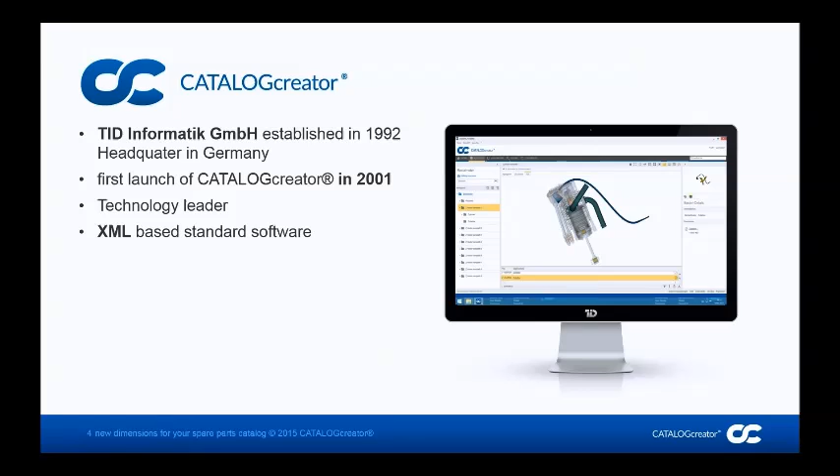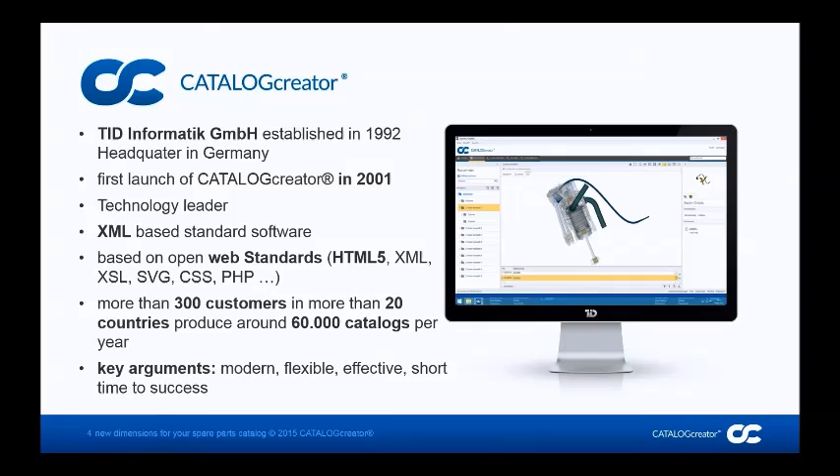CatalogCreator is the main product of TID Informatik, which got established in 1992 with the headquarters in Germany. The first launch of CatalogCreator was in 2001 and became technology leader as an XML-based standard software for catalogs based on open web standards. More than 300 customers in more than 20 countries produce around 60,000 catalogs per year with CatalogCreator. Our key arguments to choose CatalogCreator: it's modern, flexible, effective, and it takes a short time to success with CatalogCreator.

I'm super excited to present to you now the 3D catalog created with the all-new 2015 CatalogCreator. Before, we have a poll question for you to answer. So, as Mark said, please take about 20 seconds. I would really appreciate if you get back. Okay.

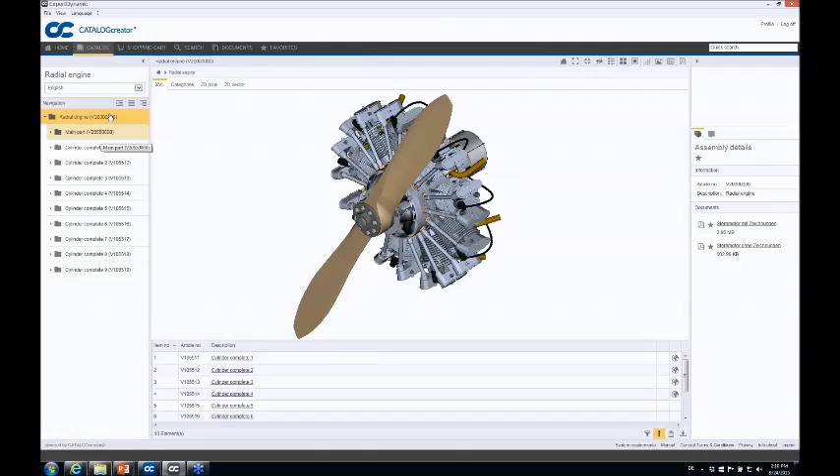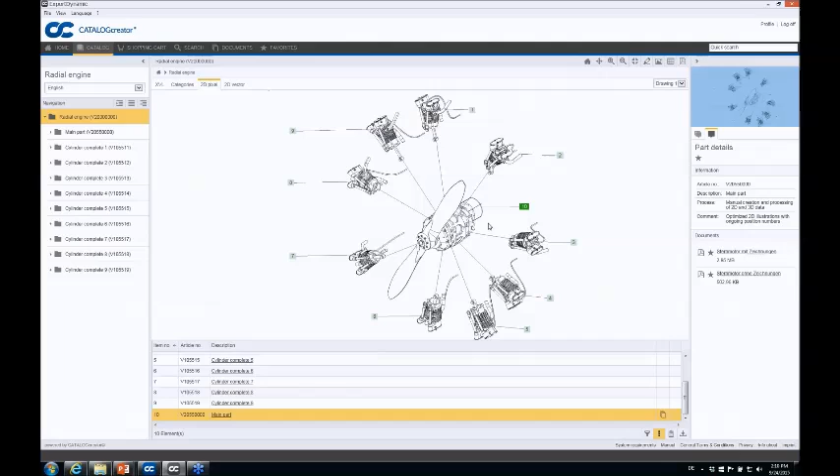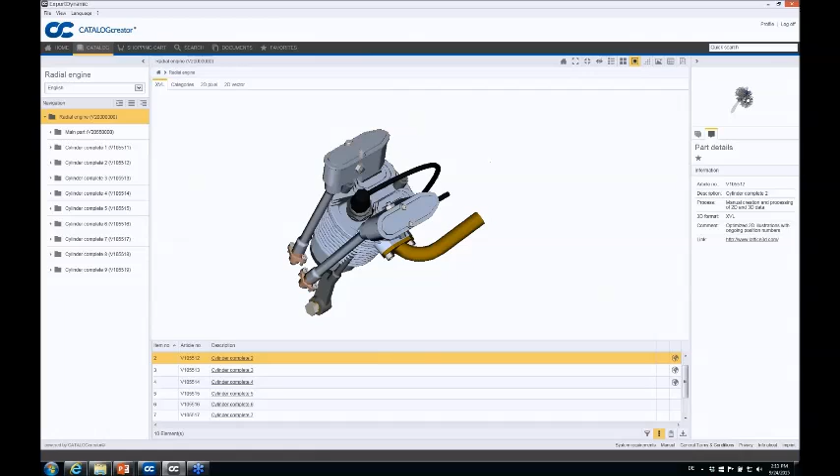We have here different tabs to switch between the views from a 3D model to a two-dimensional view, the drawing. In the lower part here, we have the parts list. And up here in the upper right corner, we have a second view. So when we show the 3D model, we see the selected part. And we have here the option to switch and show the selected part in the main area, and have the overview up here, and switch back.

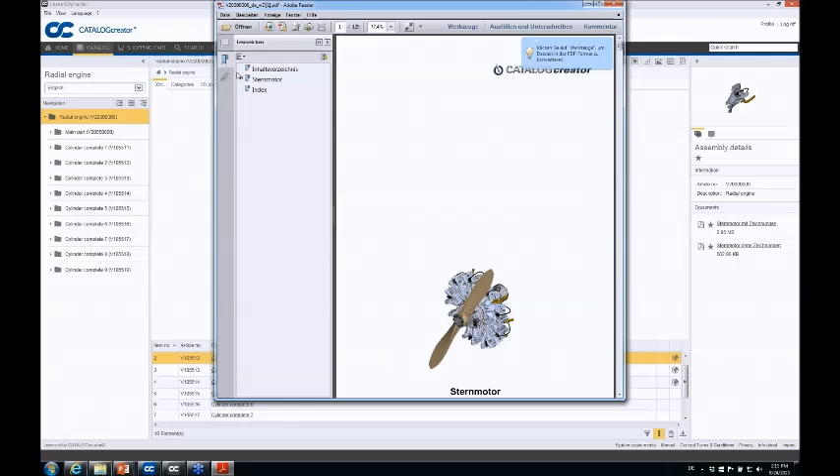Below here on the right hand side we have all kind of additional information concerning the assembly, where we can add different kind of information. We can add any documents. Here as an example, it's a German version. I'm sorry, I have to add an English version sometime, but here we added the complete PDF file, spare part catalog. But I mean, any information related to this assembly could be attached right there, or even web links and additional part information.

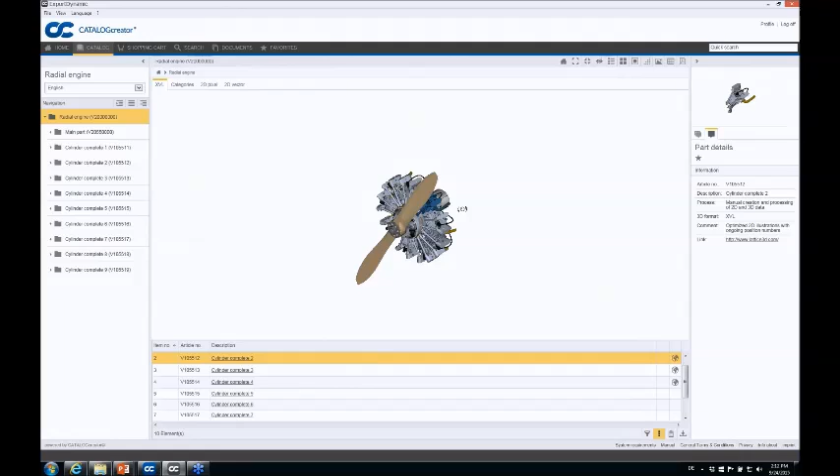So, but let's talk about the purpose of a catalog. Let's assume I'm a customer and I have a broken gear wheel for the cam gear somewhere in the middle of this engine. It's very intuitive. All I do now is I know it's somewhere right in here, and I double click. Something is going on, and as you can notice, we're moving down the structure tree deeper into the machine, into the engine.

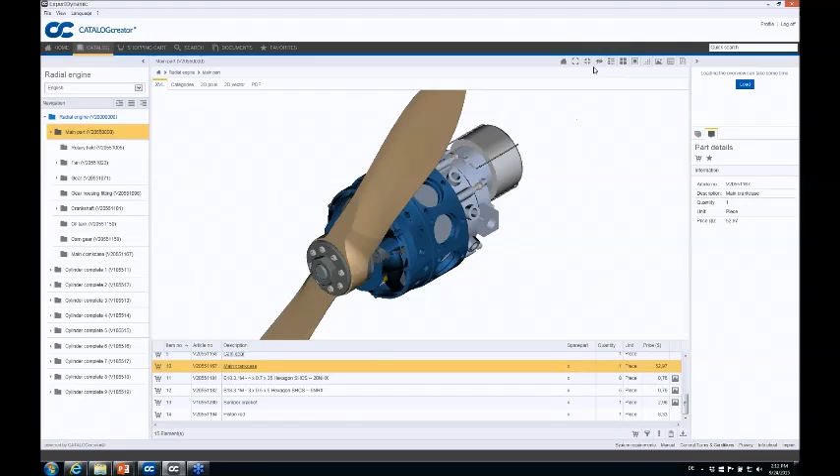I know my gear wheel is somewhere behind this casing, so what can I do now? I don't see it. There's an option right here where I just hide the part, and here we go. I already found it. This is still an assembly. I want to go down all the way to the gear wheel by double clicking. I'm going one level deeper into the machine.

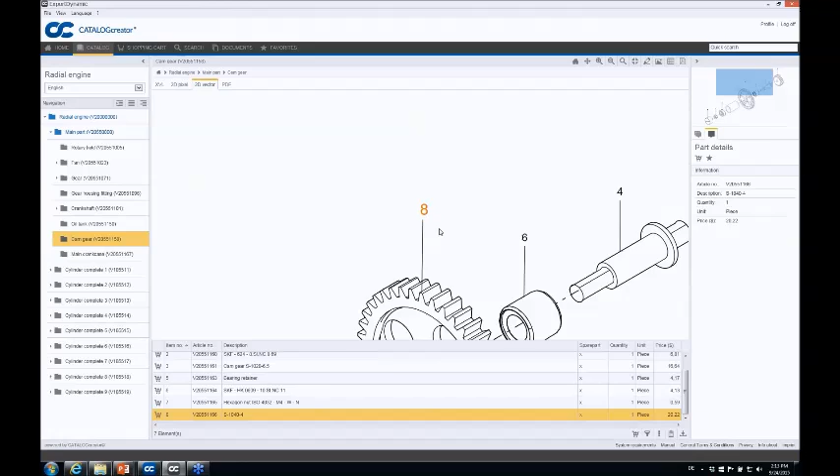And here's my part. Now to verify, I could also click on the drawing and have a different view, or whatever file format is attached to this assembly. I now can add it to my favorite list, or simply add it to my basket.

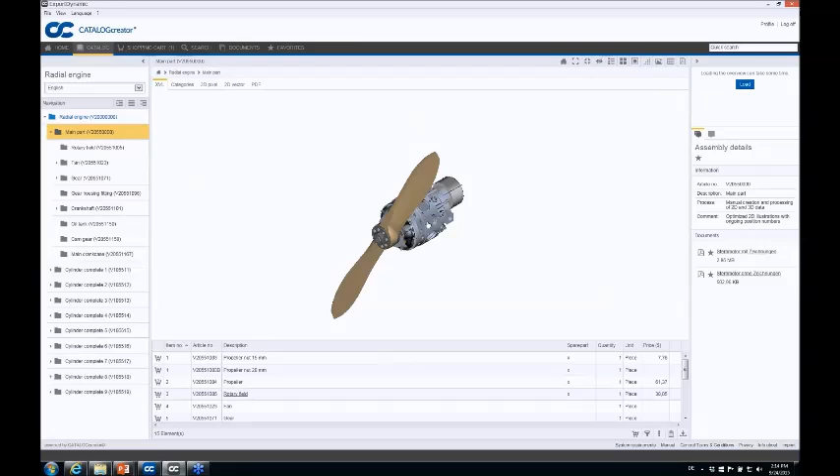Okay. Oh, now I just realized I forgot to add the hex nut which I need to mount this wheel. But now I'm too lazy to navigate through the whole engine again, so let's try out the search option. It's very intuitive again. I have here the option to type in any search word.

In our case, let's use two simple words. We're going to search the entire catalog, and we're going to search through the entire structure because I have no clue where I found my gear wheel.

Okay, it seems like I'm having a problem now because I found tons of hexagon nuts here and I have no clue which one is the one I need. But I remember the wheel I needed was for the cam gear, so I simply filter my result list with cam and one part is left.

So I'm not sure if I'm just lucky at this point and got the right nut right away, but to double check, I just click on the part and I find an assembly which looks very familiar. I'm sure this is what I just had opened before, but I don't see the nut.

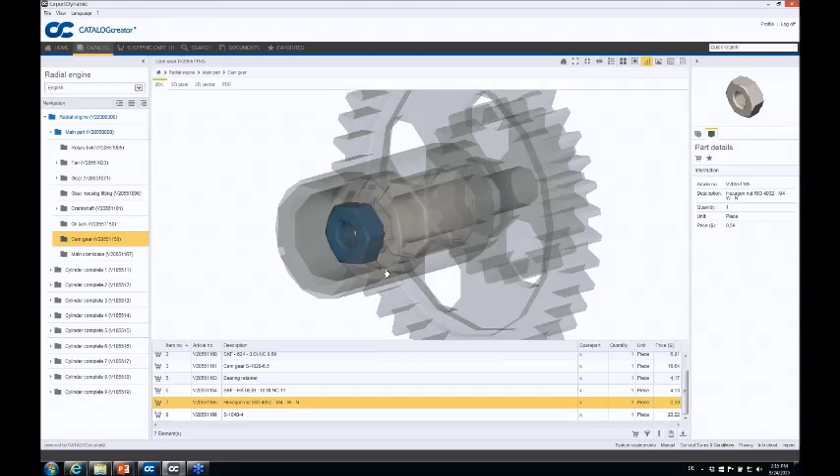So here we have another option where I just click on transparent view, and as you can see, here's my selected part. As well, when I go into the drawing to confirm, at this point I'm 100% sure I found the part I was looking for. So let's add this part as well to the basket.

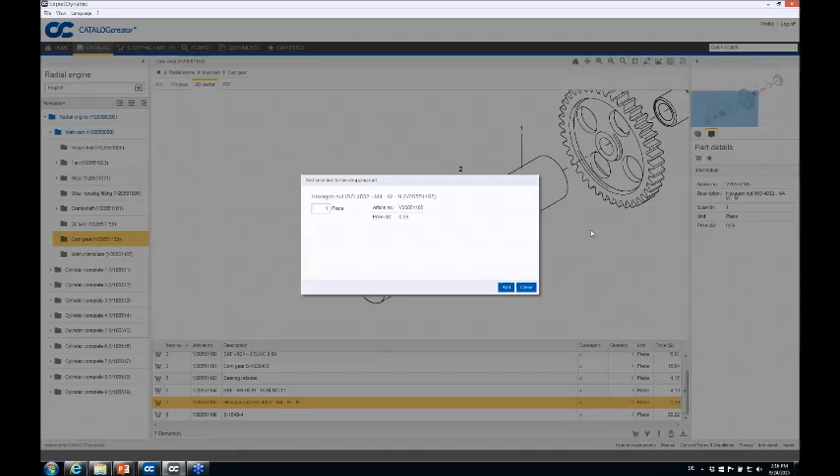So this was super easy. Don't you agree? It is so easy. I actually know of a CatalogCreator customer who increased the revenue by thousands a year with selling standard parts. I know they didn't sell much standard parts before. It was not really lucrative because they had to increase the margin.

But now, since it was suddenly so easy and convenient for their clients to add standard parts to their order, a higher margin did not matter anymore. Just imagine the time, hassle, and expensive downtime of a machine a customer can save by correct and fast identification.

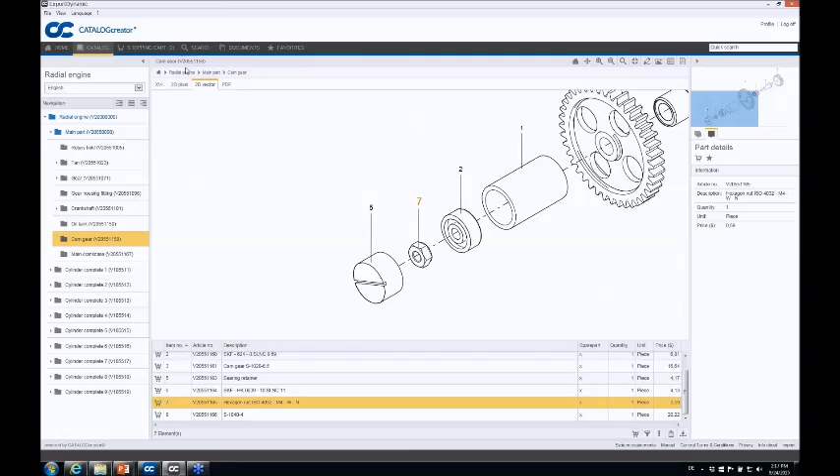So now, after we added these parts to the shopping cart, at this point we would customize the checkout option. We could simply turn the basket into an order email for manual processing, or hand it over to an existing web shop or ERP system for checkout. Or we could also pull real-time information like availability or pricing from an existing ERP or shop system.

We also have here our favorite list, which is very convenient as well, since it collects all our favorites by catalog. Let's imagine we would have multiple catalogs. We would see them here, and here we can switch between the selected parts and assemblies, or documents. Let's add a document to see how that looks.

The loading time could be dramatically reduced. Let's do this first. We have a customer profile where I can change the settings, how I like things. So let's say the 3D model is nice, but it takes a bit of time to load. So I'd rather see the categories first as a first choice. I'll save it right in here.

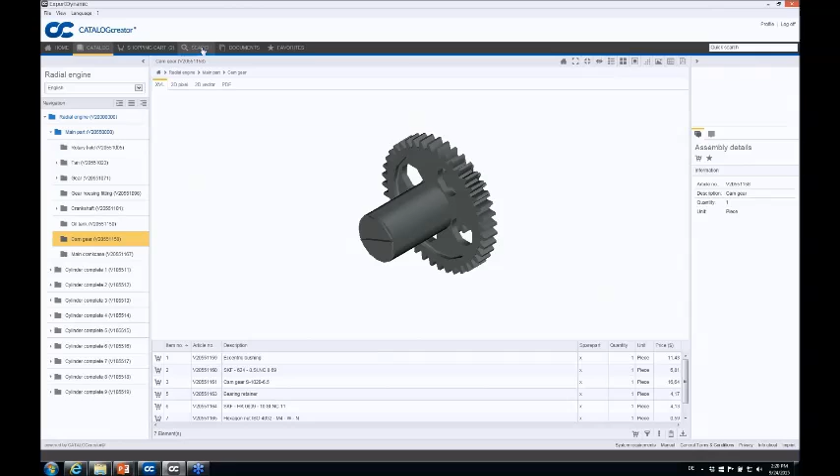So when I go back now and go on the document tab, I have all the documents which I need related to this machine. And also when I go back to my search, it keeps the search history. So when I start a new search, let's try an article number. Here we are back again. I have here my search results.

So this was a quick overview of the online 3D catalog. And I hope you liked it.

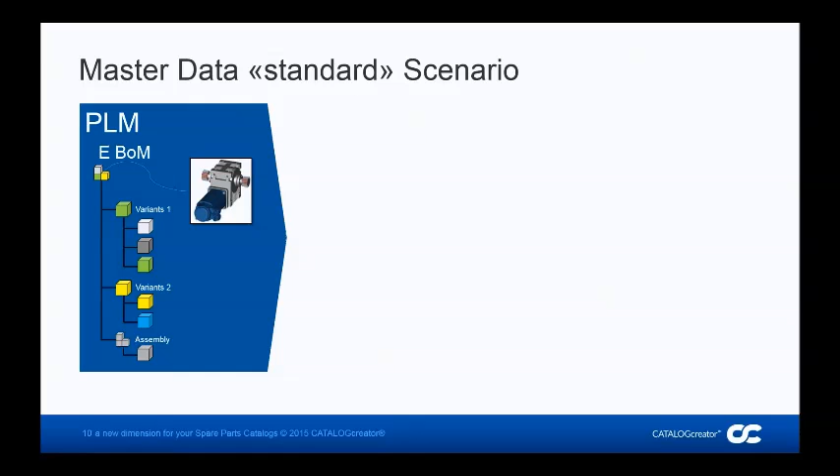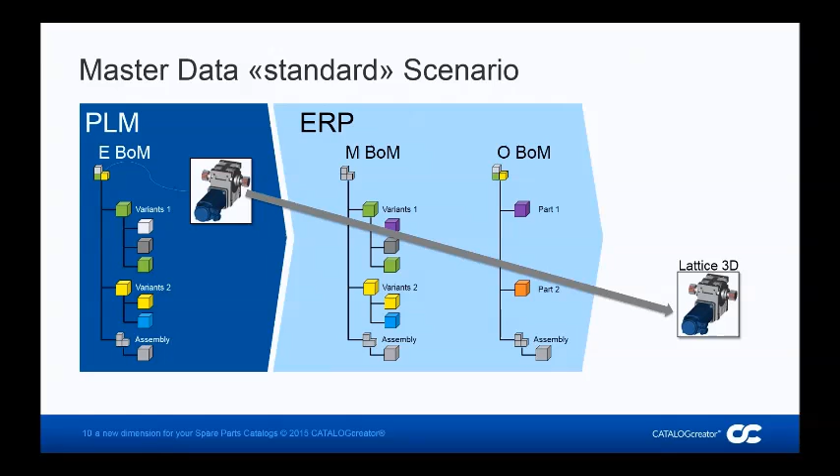So let's show my screen again. To create a simple online catalog, we don't need much. Some geometric data, ideally some three-dimensional MCAD models, usually kept within a PLM or PDM system, and a bill of material - short BOM - with a structure ideally representing an actual machine order with all the changes made to the BOM.

But often this is not all. We probably have additional data, even from different databases. It could be information from a linguistic database, since corporate ERP systems often are limited to 4 to 8 languages. Or let's say we have the spare part prices in a different database, since the whole after-sale gets managed by a different department on a different ERP client, for instance. In addition, imagine all the manuals and maintenance instructions which could bear valuable information for spare part service or spare part identification.

Before I show you the creation process now with this kind of data, I would like to know who of you works with a PLM and ERP system. So please take a few seconds to answer the next question: Does your company use PDM, PLM, ERP systems?

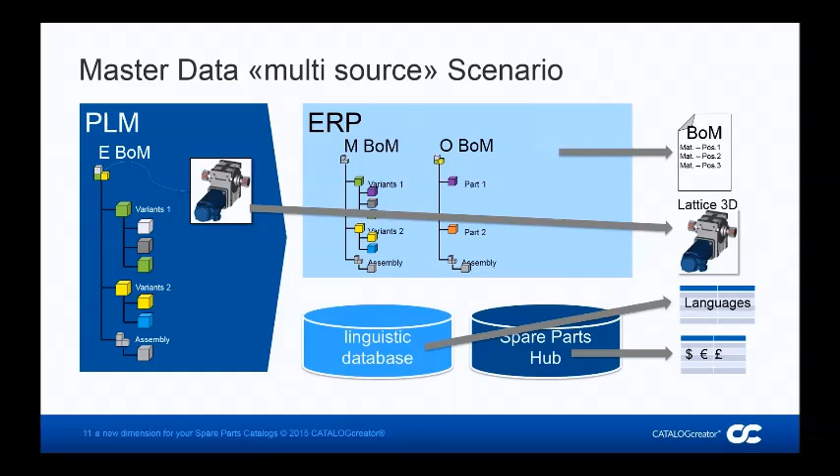So let's show my screen again. So how does such a catalog evolve? With Catalog Creator, a fully automated process is possible, from the raw data all the way to the published online catalog. The raw data is getting exported by the existing systems, and 3D MCAD files are getting converted with Lattice tools.

And as you can see, here we have the raw data. Then CatalogCreator optimizes and standardizes the raw data by predefined rules with CatalogCreator and Lattice tools. For instance, old pixel drawings getting digitalized with Hotspot Editor, which means all the position numbers are accessible to create a link to the parts list, or we have all different kinds of tools for XVL, which would expand this webinar too much to go into details, but where we can make sure, for instance, intellectual property protection is provided.

And then CatalogCreator merges all this information and creates links between the BOM, drawings, and attributes. And all these links are created. And finally published as an interactive catalog and as a PDF/printout document.

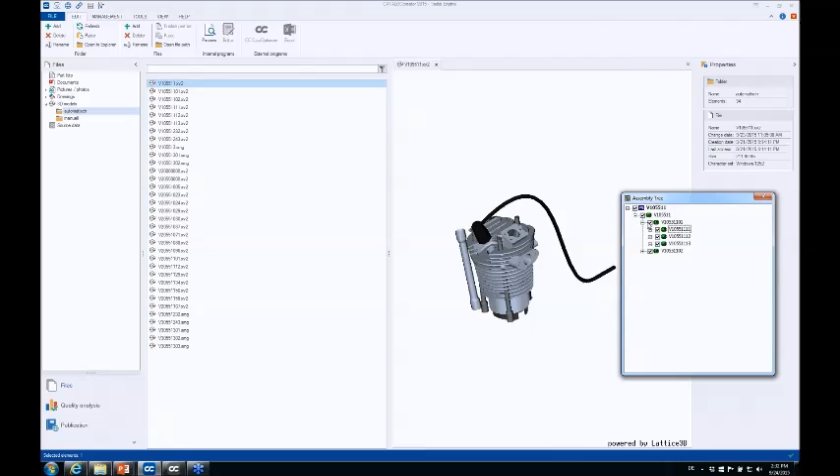We have the structure tree out of the MCAD model, or even can look up properties out of the CAD system.

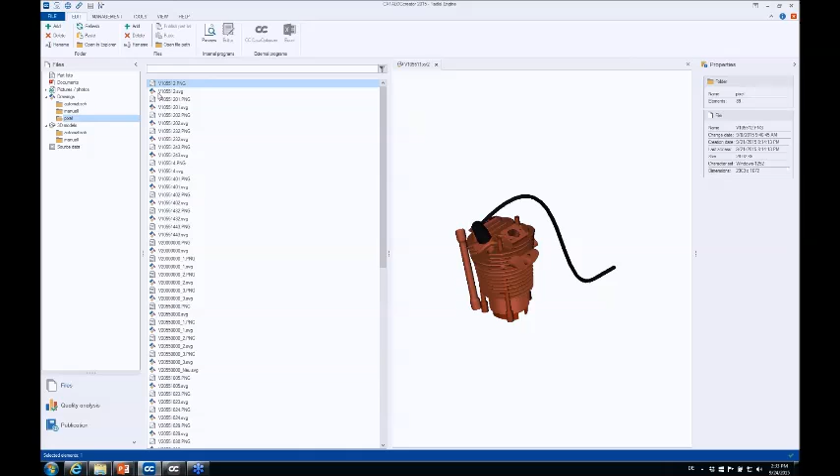We have two-dimensional drawings processed with the Hotspot Editor. And as you can see, this is a pixel file, but all the position numbers are digitalized.

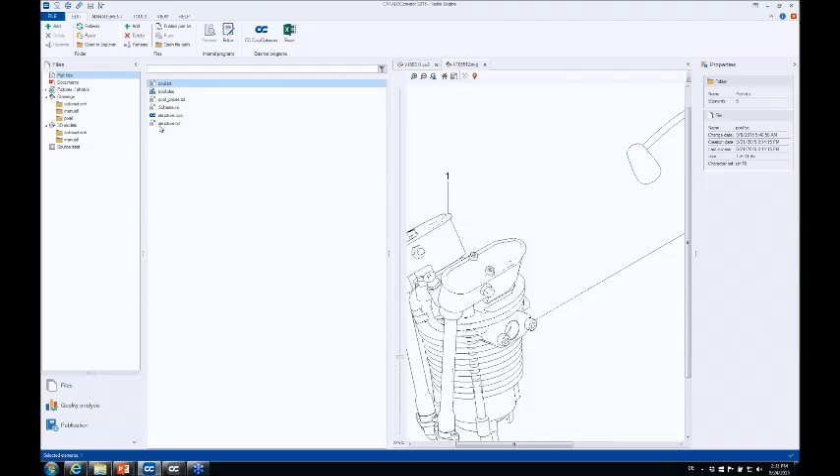And the essence of our catalog, the structure file, in our case, a standard export semicolon separated file.

Let's open it with the CatalogCreator Data Optimizer, where we can see it makes the structure visible again. And as you can see here, the links to the files are already created.

There are almost endless rules to create these links. We could look up a pool folder, or we can create it in combination out of any attributes out of our input files. We can combine index, part number. However, your company works with the file names. We can create the file links right here.

And as an example, we have here some pool files, also some standard export formats with no structure, with a flat structure, in this case, pricing.

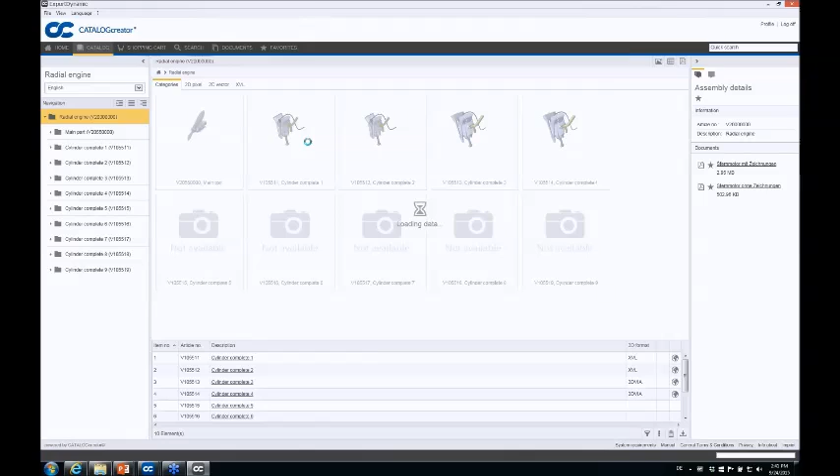So let's see what got produced. And as you can see, the catalog got created. It's the same catalog I showed you before.

Okay, let's assume we have a highly automated process. Quality assurance is very essential, especially since we don't see step by step what happens when we publish the catalog. So we have the option here, for each publication, CatalogCreator can create a quality analysis.

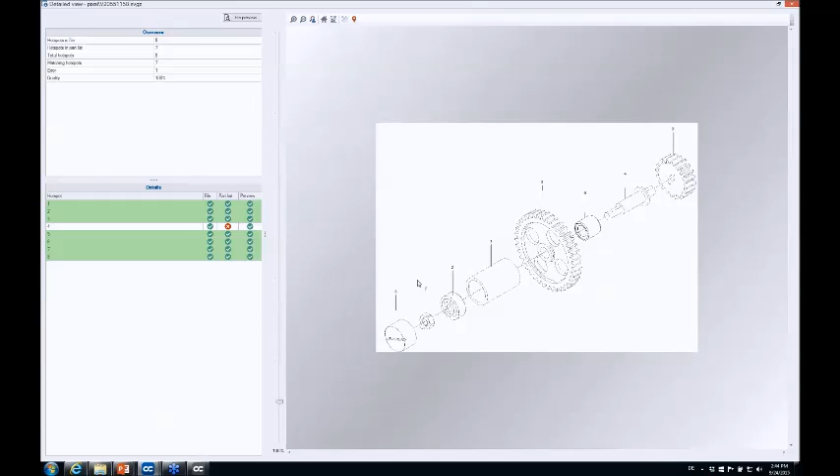This is a pixel drawing again, and right away I see where the issue is. I click on it and I see the part, and apparently this part doesn't exist in the catalog in the parts list. Let's double check. Let's find this drawing again in the catalog.

And as you can see right away, it is true. Number 4 is missing. So at this point, we can go back, and ideally, we go all the way back to our either PDM system or ERP system, to find the source of the error. And this way, I mean, I've worked with so many companies...

Because once they started creating electronic spare parts catalogs, their master data quality increased dramatically. Because so far, this is one of the few applications where, from the whole process line, you match a bill of material from the production chain, let's call it the order BOM, and match it with the PDM file. Pretty much any company struggles with master data quality, and this is why I sometimes say CatalogCreator is actually a master data quality check tool, and it also creates a catalog, just as a joke.

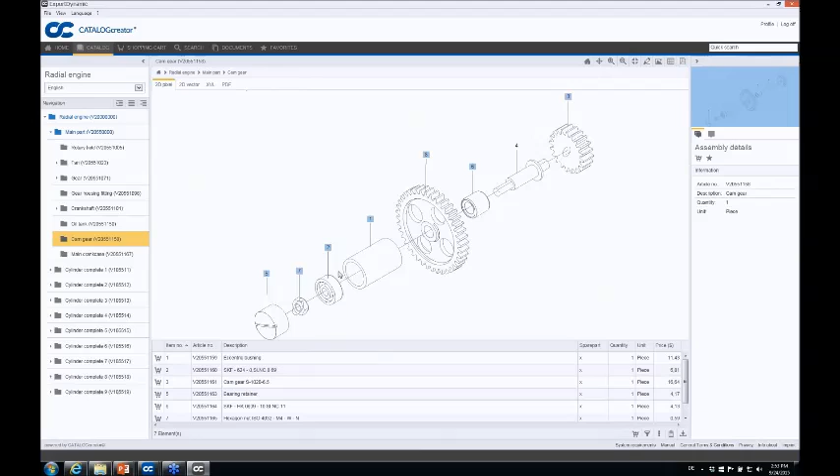Okay, and related to that, can you actually show an assembly without giving access to the parts underneath it? For example, just show the assembly, but not explode it into parts. I'm not sure if I understood that right. So maybe you show an assembly. We have an assembly of a gearbox, and we want to limit the customer to only being able to see and select the gearbox, not to explode all the parts of the gearbox. For example, you may want to force the customer to replace the whole gearbox and not be able to access the individual parts. Right, yeah.

We can set break criteria where we say we don't want to go into more details, where in that case the gearbox would turn into a part. It wouldn't be an assembly anymore. And we have total control of the, basically I can show it right here.

And also on the information, this is also a setting which we would set in the user profile, where, let's say, we just want to show the article number and the description, and I just took off the article number. In that case, that's a mapping mistake I made just before. But just to give you an idea. I hope I understood that question right. Yeah, I think you got it right. So you can limit the level which you can go down to on an assembly.

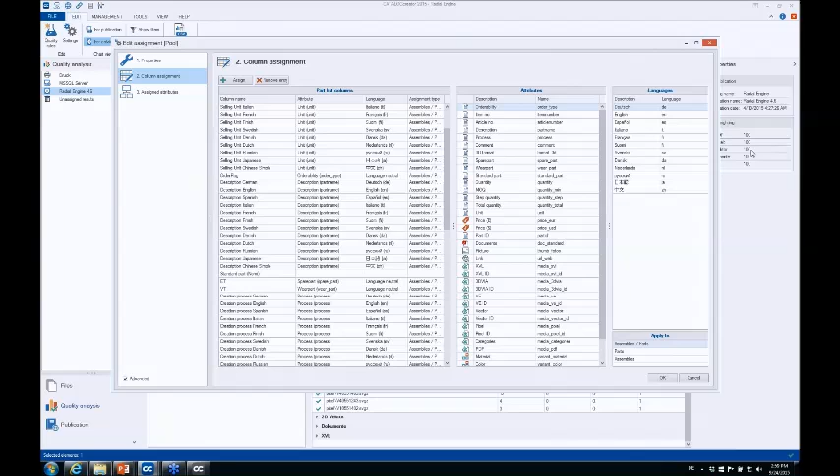And to go back to the other question, we have an attribute called orderability. Let's say in the ERP system we have a flag on parts which says those cannot be ordered. Then we just create the connection there, and they show in the catalog for navigation reasons but are not orderable. Also, we have spare part, wear part, standard part, all different kinds of attributes which help the customer identify parts, which is very handy. If I go into the catalog, let's see here, these are all filters where I can say I only want to see actual spare parts.